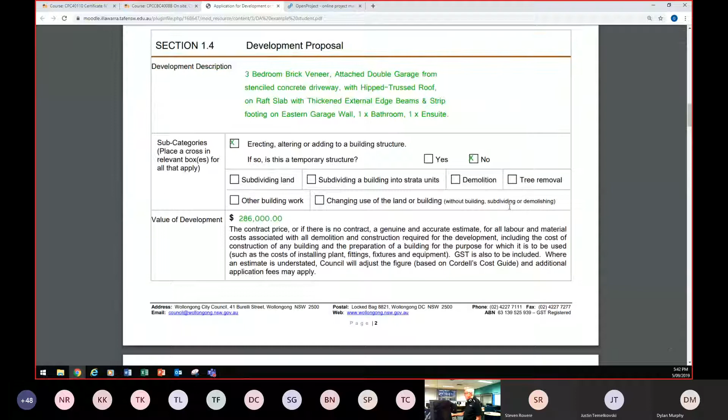Well, this one isn't PDF fillable now because he's already completed it. So it goes through the development proposal, you've got to describe what the development is. If we're talking about the Smith House, it's a new dwelling, and you would just describe it.

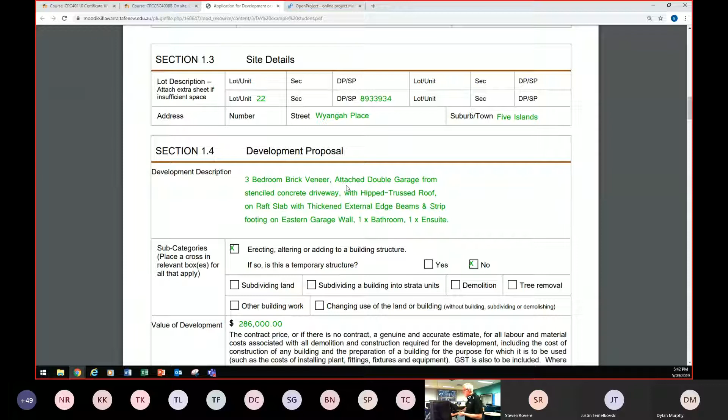You then look through the value of the development. The council wants to know the price of the development. It describes what you've got to allow in there, and not all contracts will be exactly the same, because sometimes the owners can only afford to get one bathroom complete, get the ensuite finished. They've got no children at this stage, and they'll say they'll finish the other ones down the track. So this value is more—there's a percentage that gets paid to the long service board, so that's probably one of the purposes of the value, so they can calculate how much you need to contribute.

So we talked about this the other night. If the builder completes the document, which is what Matt Green did here, down here you've got to get the owner's consent. I'm not quite sure with owner one, owner two—if there's two owners on the deeds of the house, you may have to get both owners to sign the document. I'm not 100% sure on that, but you could ask when you're filling the forms out at the council you're at.

Most of it is pretty straightforward, there is a lot to fill out. Just with this, it's got the floor area. All these things you should be able to put your hands on virtually straight away because you've done the Smith cottage, so that example's there for you. It's always much easier if you've got some sort of example there because it takes away a lot of the uncertainty—you've just got to change the details.

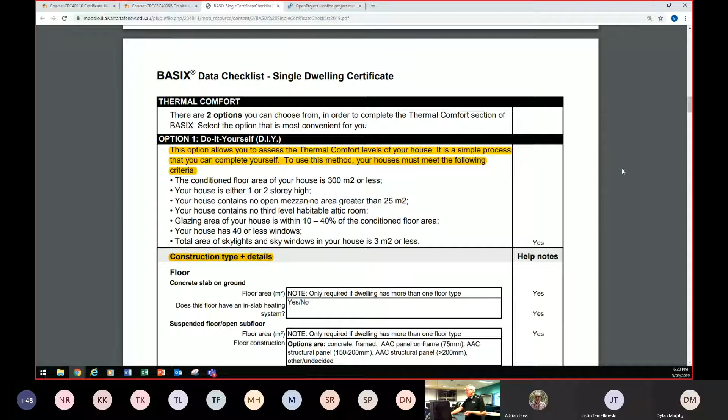But alright, so on this is the option - you can do it yourself. So we talked about this, some of these forms that you can actually do yourself rather than pay someone else to do it for you. So you can look at these forms and decide yourself.

No, we didn't have food growing from it. We actually had some native plants and also some roses and things like that. But yeah, I can imagine if you had it near the strawberry patch.

Okay, so we can open that. Now, I actually quite liked these couple of things here. Okay, this is the BASIX checklist for single dwellings.

This actually shows you a little bit more on the house and the sort of house they're talking about. So we've got a single dwelling, and the tool assesses a single home project by looking at three components of sustainable building design: water use, greenhouse gas emissions due to energy consumption, and thermal comfort.

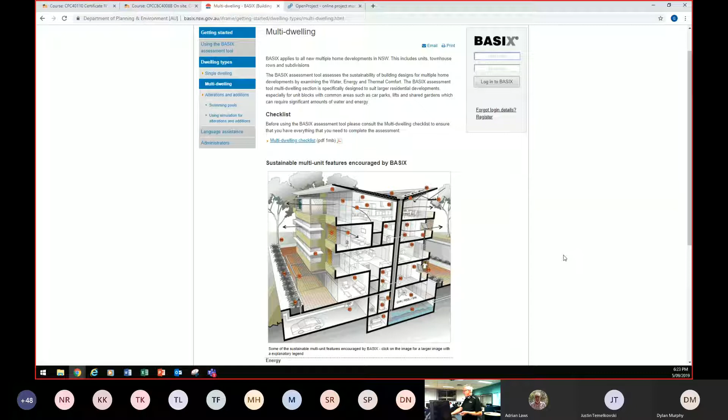I just clicked on multi-dwelling. Here we have multiple dwelling, and you can see underneath they're talking about light shelves for improved natural lighting, solar hot water systems, and natural light in kitchen and bathroom areas. There are so many things you can do, and a lot of them aren't expensive - it's just having a little bit of knowledge.

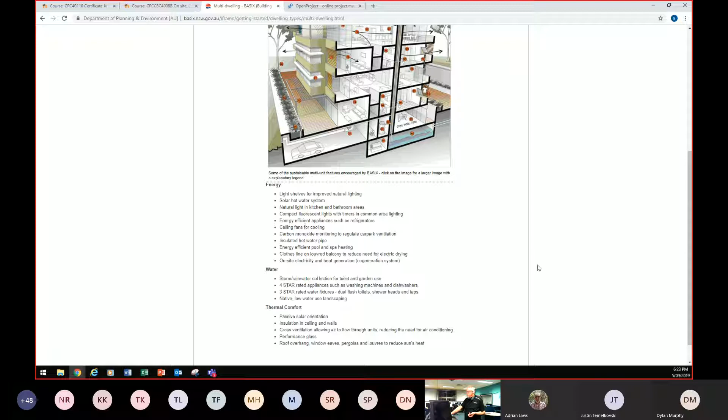Ceiling fans for cooling - you can have ceiling fans or a pedestal fan. A pedestal fan is just one of the upright ones that you'd sit on a table, the old-fashioned ones. I'm not sure which one would be more efficient, but a bit of air movement is good.

I worked in a house once that had like a one metre exhaust fan, and what it did was ducted all the air in the house straight outside. So what they did, it was a big house, they would pick a room, sit in it, turn this massive exhaust fan on, close all the other windows in the house, and open the windows in that living room. The breeze coming through those windows was like being hit by a southerly. That was their answer to air conditioning, and it was actually pretty efficient.

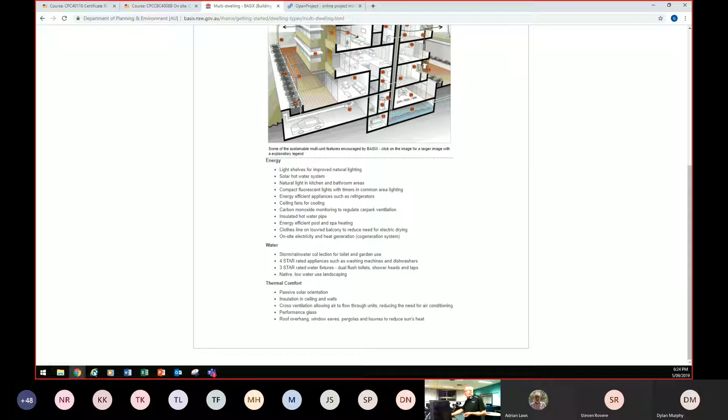So we go back. You can see here, as I said, it just tells you the different options. We can go to swimming pools if we wanted to - modelling process.

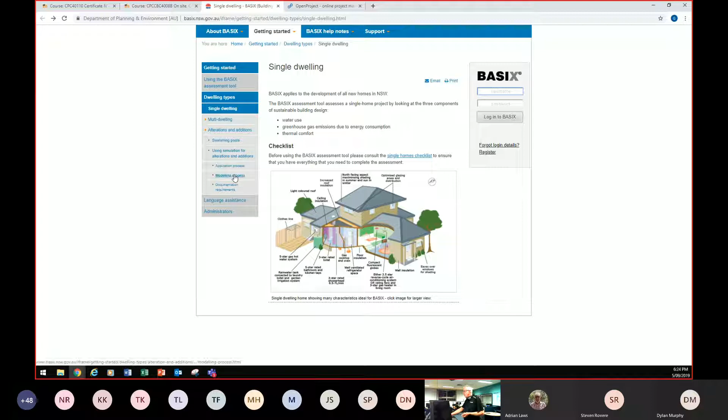This is for additions and alterations, but I'll leave this. It's got, as I said, so many functions that you can actually use. So that was that one there.

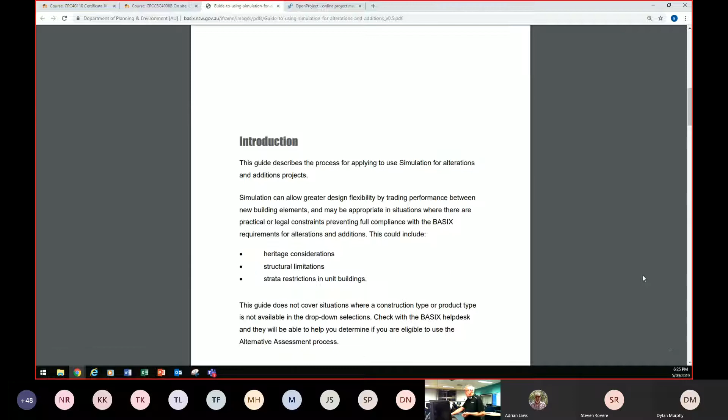If we have a look at the guide, this is the BASIX guide for alterations and additions. So this is how they look at it - it's just an introduction, and it describes the process of applying for a simulation.

Before you start running simulations, we recommend you contact the BASIX Help Desk to check whether simulation will be permitted for your project. If you have a look here, why you believe that your project cannot fully comply with the BASIX construction and glazing commitments.

It was more this, the modelling process, that I was interested in - this was how they described existing, the reference, and the proposed. It gives the definitions here. The modelling process for alterations and additions is more involved than for a new dwelling. You need to run three separate simulations: existing,

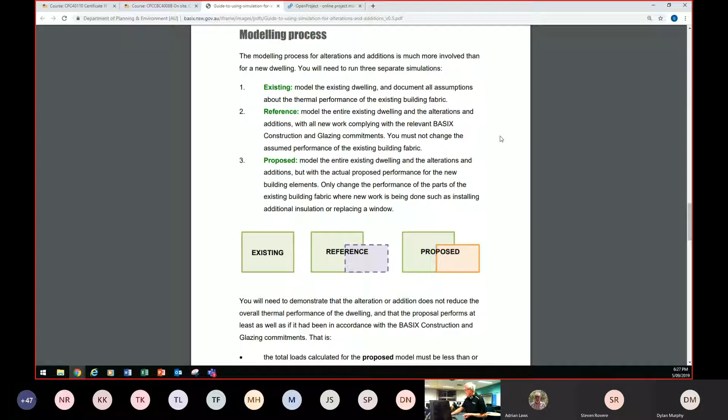the model - you have to model the existing dwelling and document all assumptions about the thermal performance of the existing building fabric. I don't know whether any of us could actually truly complete that adequately, or whether you would need someone to come in and then make the determination on your behalf.

It has the documentation requirements there - if the thermal loads meet the criteria described in the modelling process section, you will need to collect the following documentation. There's a lot of work. I think it would be just as easy to employ someone, but it is nice to know some of the background, and it's also good to be able to actually find the documentation that you need.

Okay, this one here - this actually talks about passive design and shading.

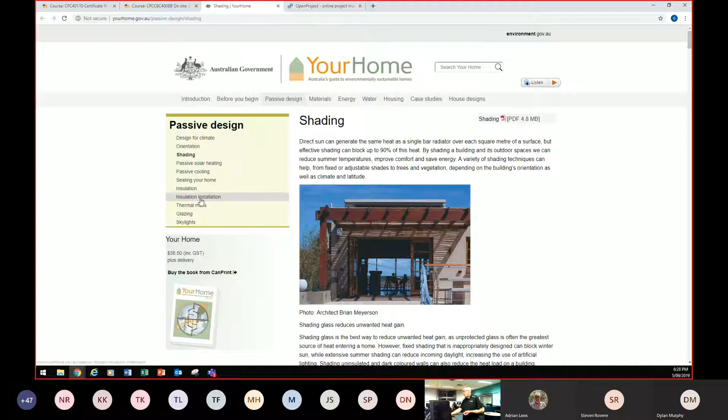If you have a small eave, what you can do sometimes, if we look at this section here, there are some support notes. Radiant heat from the sun passes through glass and is absorbed by building elements and furnishings, which then re-radiate inside the dwelling. So the sun comes in through your window, hits the lounge which is black, it absorbs the heat, and then it radiates the heat inside your house. If you've got carpet, it's the same thing, curtains, same thing.

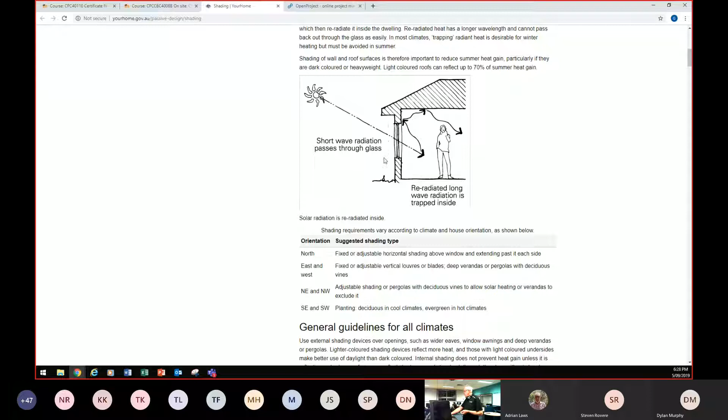So what you can do is, there are formulas that let you calculate the position of the sun, and you can extend your eave. If we had a larger eave, we would be able to block out more of that sun.

If you put a pergola on the outside of your house that shades a portion of a wall which has windows in it, you've then reduced the amount of sun that penetrates the inside of your house. Now, that's really good in summer. You want to stop the sun from coming into your house, but in winter you actually want as much sun in your house as you could possibly get.

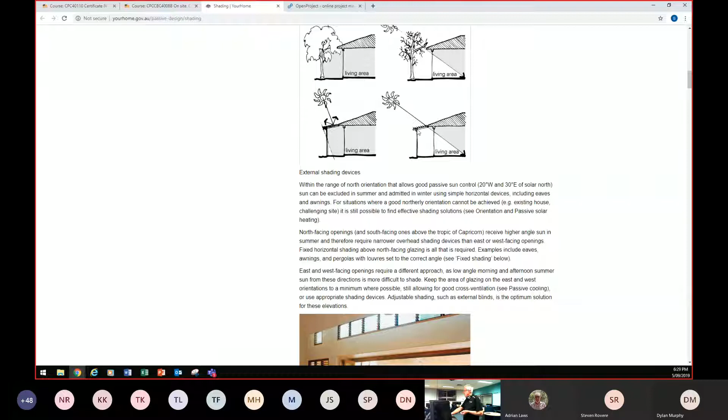They talk about shading devices. You can see here where they've got a pergola or a small screen. This is a good example, summer and winter. The summer sun is high, the winter sun's much lower.

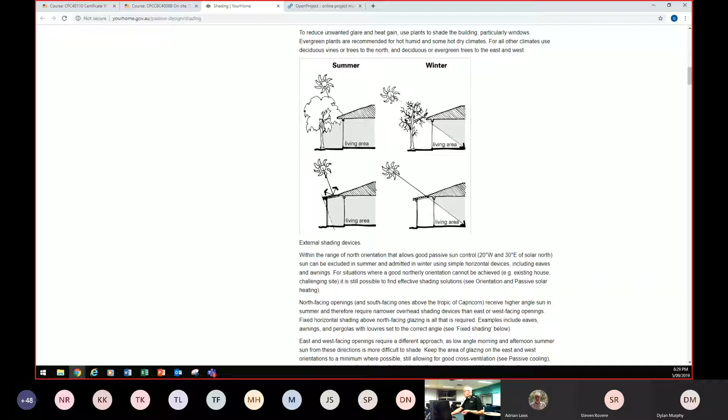That's what you can calculate, there are formulas to work out exactly how far the sun can come into your house. But look, there's all sorts of things that you can do.

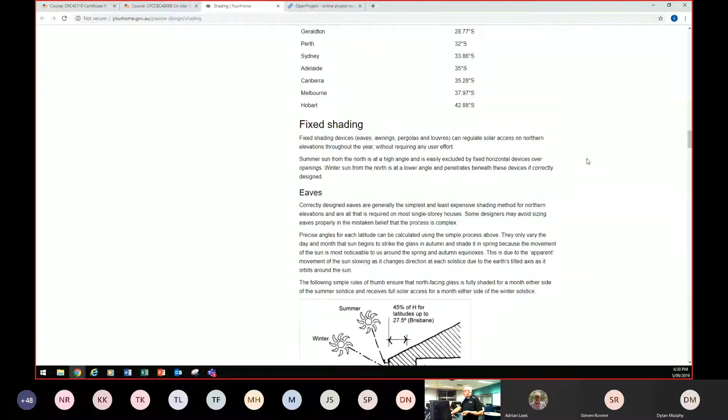Here we go, calculating sun angles. Believe it or not, probably 18 years ago, I did these calculations to see how far the sun would get into my house, and I put a veranda on the side that I wanted to protect. I can't tell you how I arrived at the answer, but I actually did it and it was right. It was so long ago I couldn't tell you why. It was the only time I've ever done it, and the only time I was motivated to do it. It's really interesting to know that it does work.

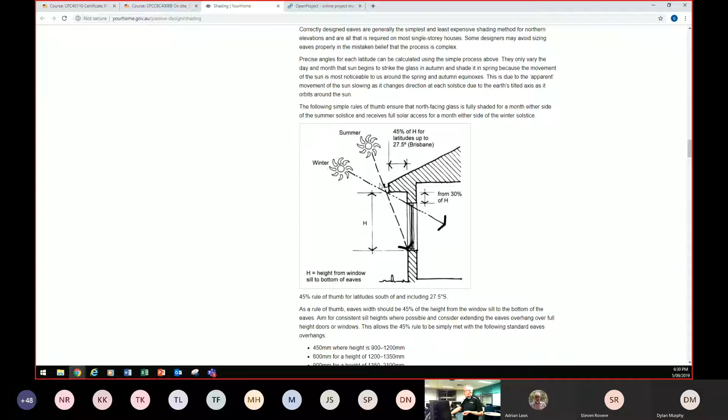The summer sun and the winter sun - you can protect your windows from getting the sun inside, and there's a balance there as to how big the eave is. This goes through all the information there. Really good examples.

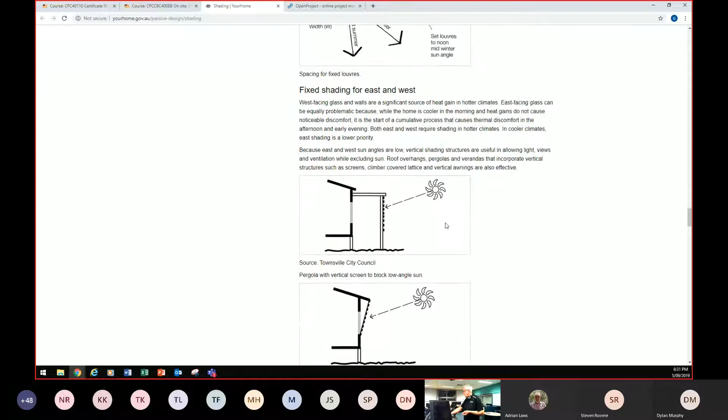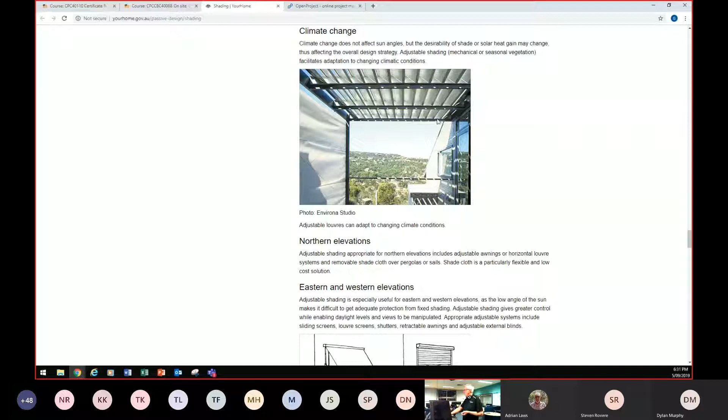Louver windows - you can have glass louvers, you can have cedar louvers, and you can see the different screening. The angles are certainly something that need to be considered, and you can see these Vergolas, I think they're called now, or something similar - they're adjustable louvers, so you've got the choice as to what you let in and what you keep out.

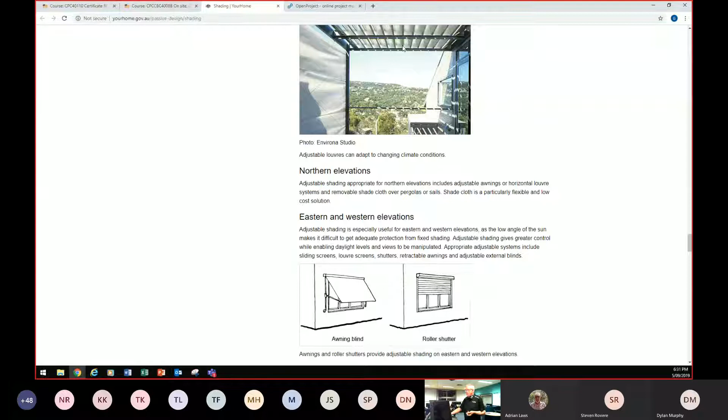There's one more quick thing to look at. This one is the same, orientation - how you orientate your house. Northerly direction is supposed to be the best. It talks about glazing size - you can have coatings on your windows as well, films. But the good thing about this is all the information is there for you.

Thermal comfort - it does offer up so many ideas. It's not just putting regulations there that you have to adhere to. It's actually showing you how you can overcome some of the scenarios to heat and cool your house.

Okay, so let's go back - I think what I'll do now, that's the end of the learning content. I'll just show, there is one other site there, but I'm not going to go through that site as well because there's so much information that you can actually look at and learn from.